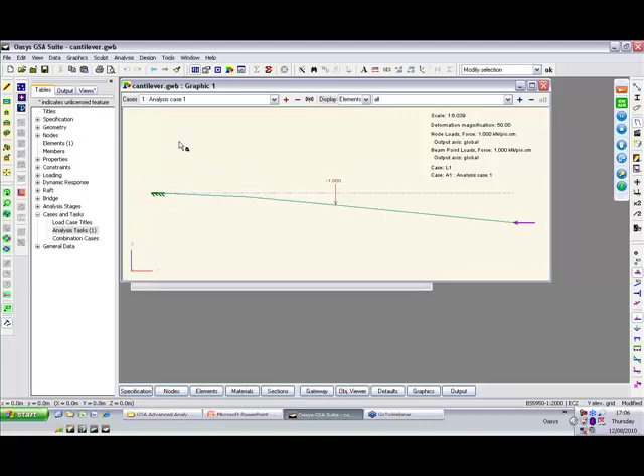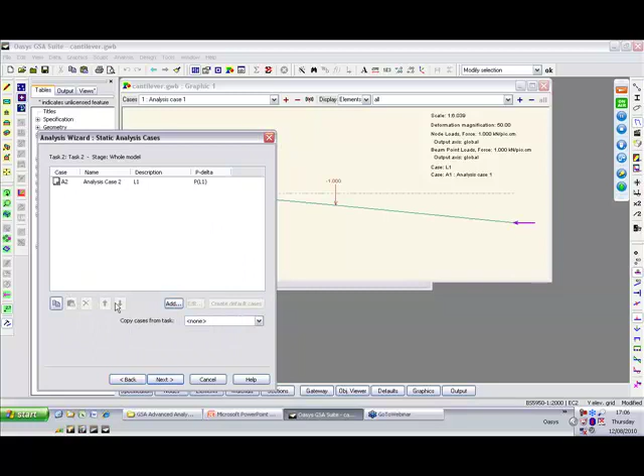And if indeed we run a linear analysis and look at the results, that's indeed what we get, as you'd generally expect. A bit of deflection. Now, we can also run a p-delta analysis on this, because obviously as the cantilever bends over, this axial load should start to induce bending moments on here. So let's do a static p-delta analysis. Add in our loads, just the one load case, and analyze this.

And if we just add in the bending moments, so you see, for the p-delta analysis, the bending moments are pretty much the same still. And again, likewise, if we do another, say, non-linear static analysis on this little cantilever, and don't magnify, we can see the bending moments and so on are very similar.

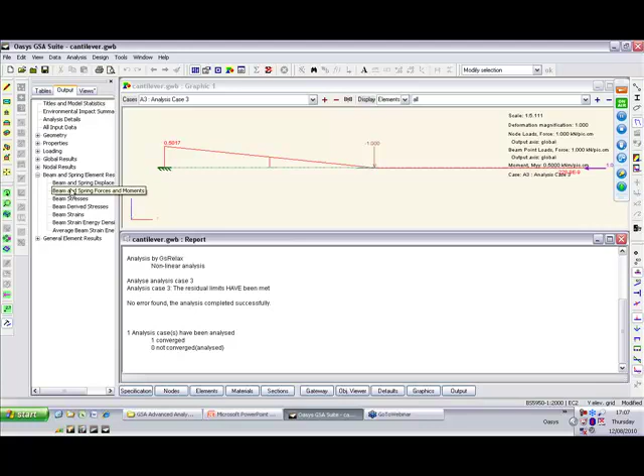If I go and open up the output, let me just reduce that down a bit, so just remove the interesting points from the results. So we're just seeing the end value. So see, case 1 is the linear, 2 p-delta, 3 is the non-linear, and you can see the axial load is reducing fractionally, and the moment, if I use the highlighter, the moment is fractionally increased.

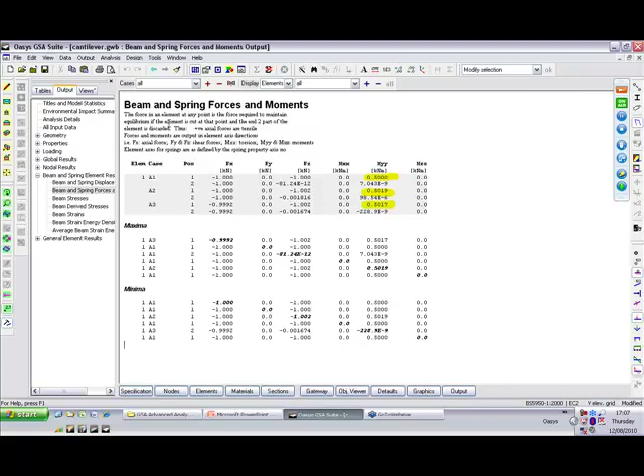Not a big difference, but then again, linear analysis is suitable for small deflections, and that's exactly what we're getting at the moment. If I go and add in that, you'll see that the deflections are tiny. So let's delete those results, leave the analysis cases there, and I'm going to increase these loads by a factor of 10. Okay, let's rerun the analysis.

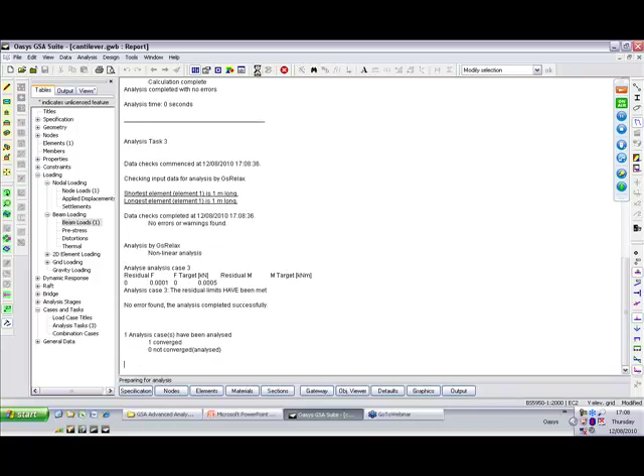Now, the load is now 10 times the size, and you'll see that, let's look at the axial load. Actually, let me just do that. Right, the axial loads, sorry, what am I getting there? By case. Right. Yes.

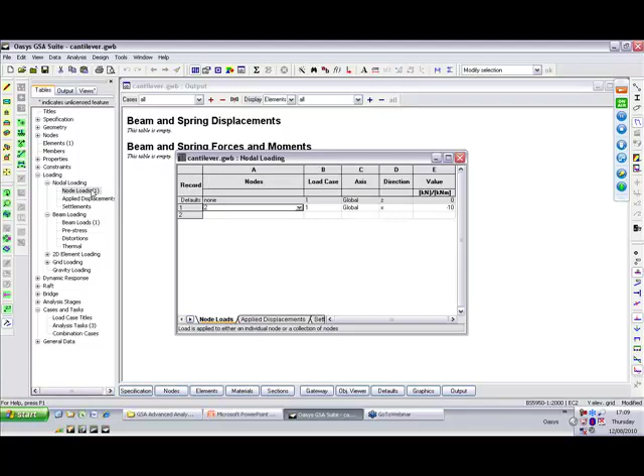The deflections, you see, are getting slightly larger with the non-linear and p-delta. And if we look at the axial loads and the bending moments, you see the axial load is slightly getting smaller, and the bending moment is increasing slightly. Now again, they're still very similar. But now, if we again multiply these by 10, so the loads are now getting quite significant for this small cantilever, and run these results again.

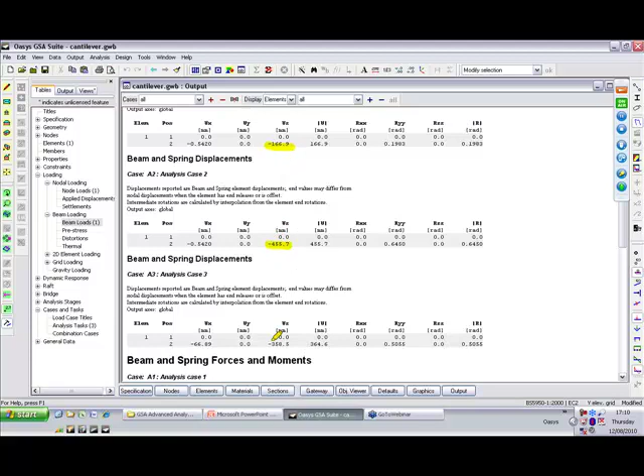We can see that now, looking at the deflections, the static linear analysis is getting large now, and they're diverging hugely from the p-delta and non-linear. This is now a large displacement problem, and linear analysis just isn't working. Likewise, if I scroll down and we look at, say, the axial force, now you notice the axial force is the same for the p-delta and the linear, but for the non-linear, axial force is greatly reduced. But on the other hand, the moment is much larger than the static.

So if we just go over to the graphical view, we get a good idea of what's going on. Now this is deformation magnification of 1. So this is actual deformation, and you can see why we're getting increased moments, and also of course likewise the axial load is reduced because the whole thing is shifting. The whole is very much a different problem to how we started. So linear analysis can be good for small deflections, but once you get large deflections in your model, non-linear is required.

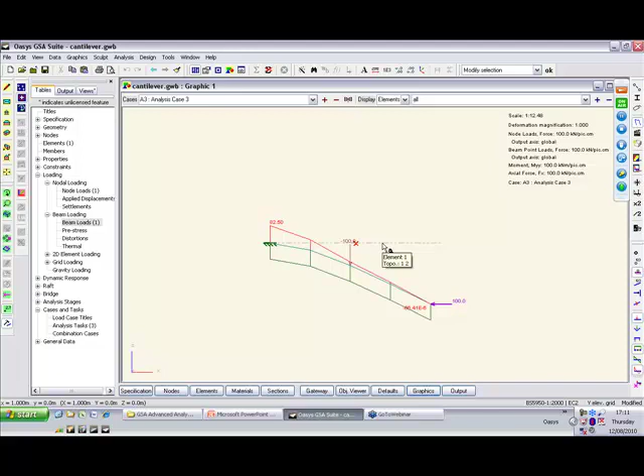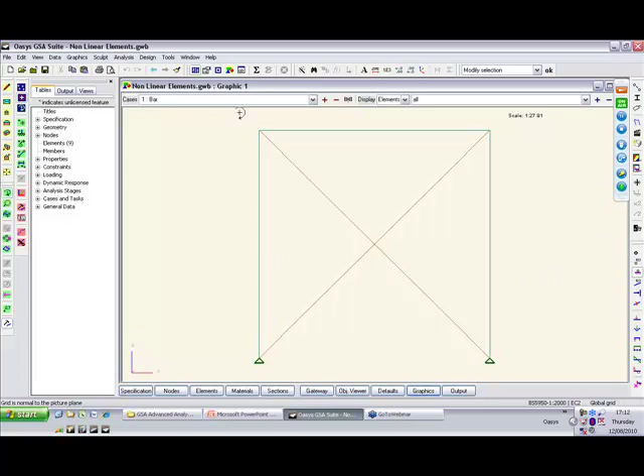Now, apart from that, so there's that aspect of non-linear. We can also use non-linear elements. Now, non-linear elements are strut and tie elements, so compression only and tension only elements. So we have a simple portal frame with beams around the outside and some cross bracing. Now I've used stage analyses on this so that the first analysis case we've just got bar elements, so bars are axial only, carry tension and compression. Oops, missed.

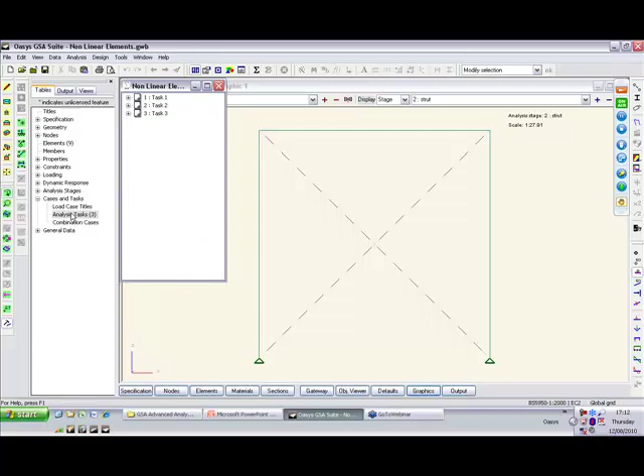Okay. We've also got a strut case where we've got compression-only elements, and tie-only. So let's run these three static analyses. These are linear analyses but with non-linear elements. And let's look at the results.

So if I switch on the axial load readout, we can see the axial load when the bars are the same in both directions, and we're getting a certain amount of bending moments. If we go to the strut model, we can see we're getting a much higher compression load in this strut, nothing in the other direction. So it's carrying the compression load from this point load at the top. I forgot to show that, sorry.

That'll make more sense. And likewise, if we turn these into tie elements, again, this element is carrying all the loads, the other member carrying nothing at all. And the deflection is slightly larger as well.

Now, because these are non-linear elements, in a linear analysis, what will happen is GSA will check them. So let's say they're using struts: if the strut goes into tension, GSA will switch them off and then rerun the analysis, and then see how the results go from there.

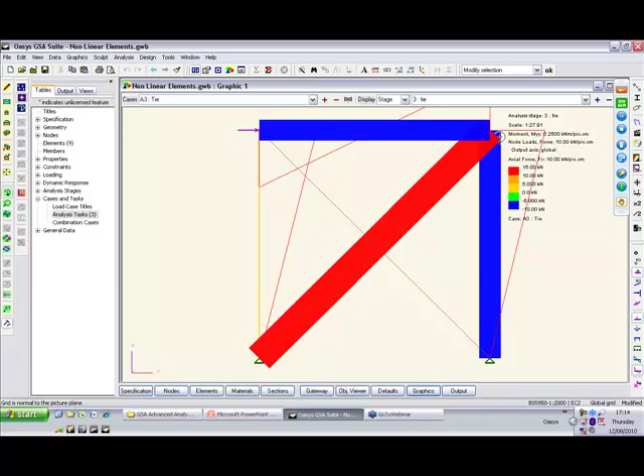Now, someone's got their hand up. Okay. Let's check. Well, if you've deliberately put your hand up, can you put a question in to us? That's Will. Okay, no worries. All right, I shall press on.

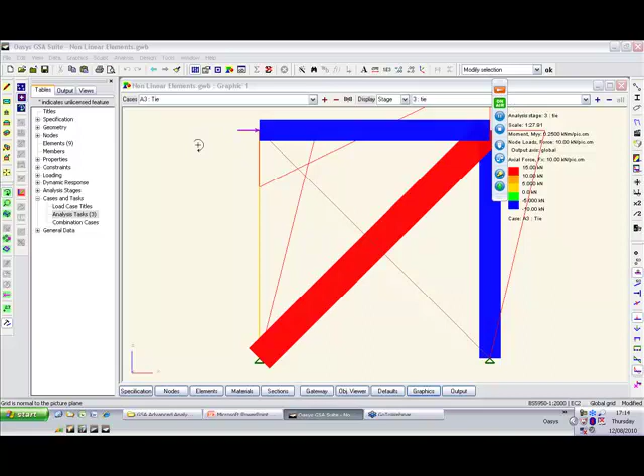Alright, so that's non-linear elements, but the linear analysis, and because these are non-linear, you can't then combine the results together as per normal. Okay, so we've also got non-linear materials. Now, for a non-linear material, basically we want to induce plastic hinges and that sort of thing in the model.

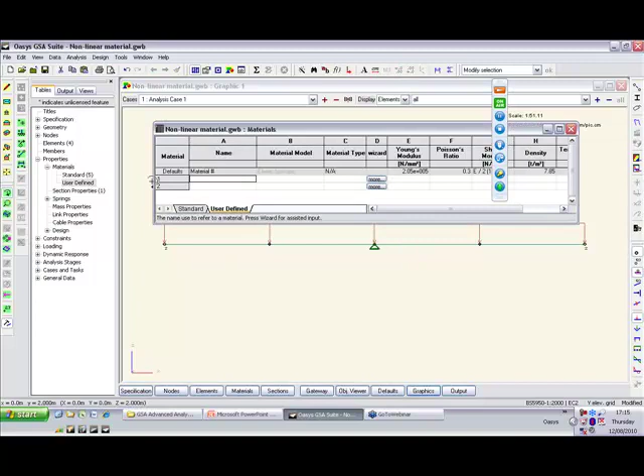So here we have a simple 2-span beam with a UDL on it, and if we set up some user-defined materials: in the previous version of GSA, you could specify plastic capacities of materials. Now we've actually got a number of different material types in here: elastic plastic, and also now orthotropic materials, for your 2D elements and timber materials and so on. We'll be talking more about that in the next webinar. For the moment, I'll just look at plastic materials.

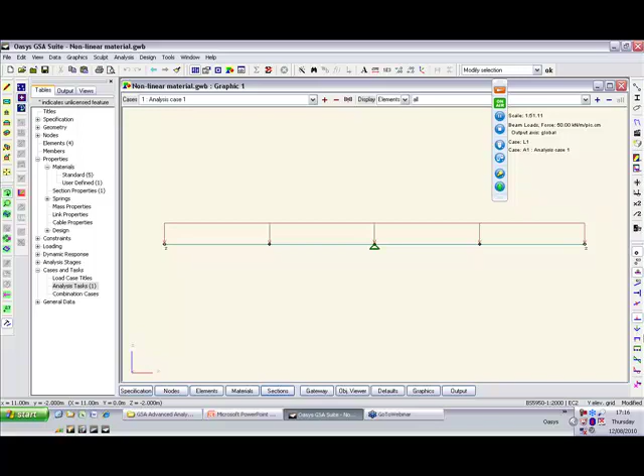So if I base this, let's say, on steel, we see we've got a yield stress in there of 275 newtons per millimeter. And make sure we apply this into the sections. Now, if we run a linear analysis on this, if we just hit the Analyze button, we can see that we get more hogging moment than sagging moment, and that's all to be expected.

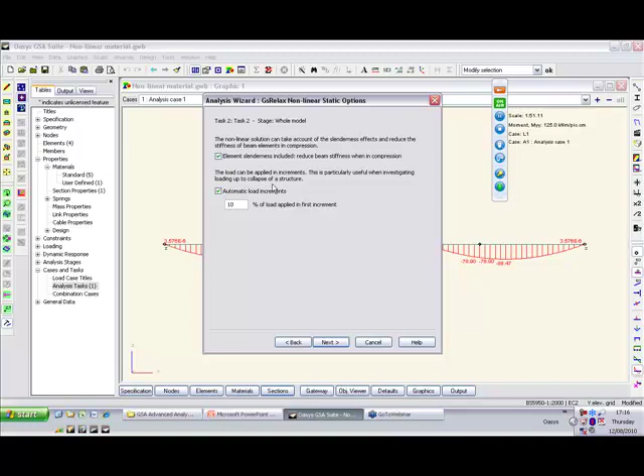Now, if we run a non-linear analysis on this with the non-linear materials, we can increment the loads until the plastic hinges form. And I've got node number 5. Non-linear static, increment the loads, deflection control on node 5. We can make the analysis stop once the model has deformed too far. Being non-linear, if the model is fully yielded, it will stop anyway, but I'm adding that in just to make sure. And then of course in the Z direction,

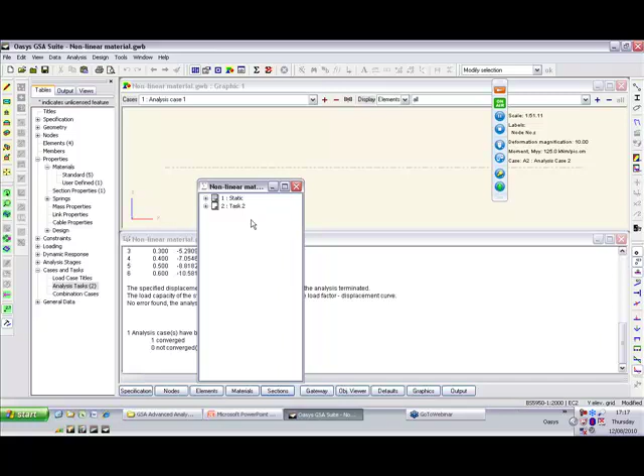we add in our load case and analyze and see what happens. Okay. Now that just reached the deflection limit. Alright, I am going to rerun that. And let's just take the displacement control off and see what happens. That's better.

We can see here that the sagging and hogging moments are now effectively the same. We've got plastic hinges, and we can see in the loading increments back here, first elements 4 and 5, the central parts, have yielded in bending, and then finally the middle 2 spans have yielded.

So now you'll note that non-linear elements automatically cause a non-linear type of analysis, though admittedly it's still a linear iterative analysis, strictly speaking. If you have non-linear materials, you need to specify a non-linear analysis to get the plastic hinges forming.

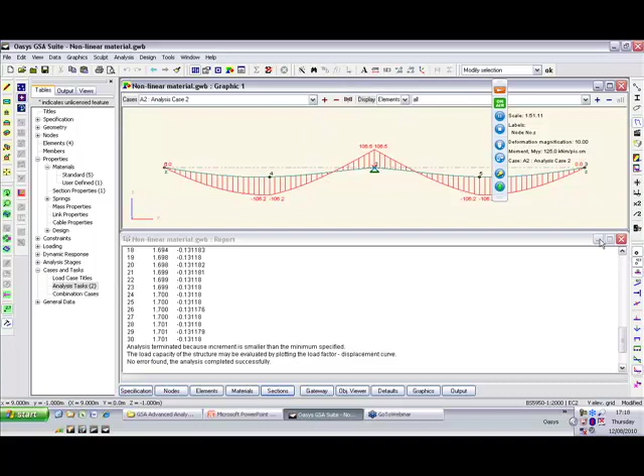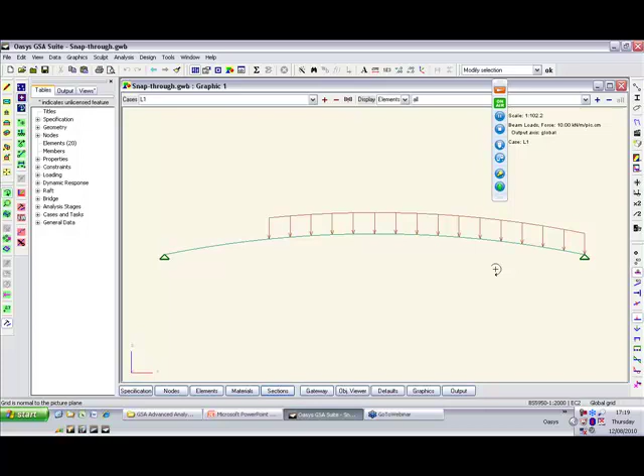Now this load incrementing is also quite good for geometric non-linearity. So if I take this model, snap through, here we have an arch model. It is pinned at the bottom, and I have a load over part of the structure. And what I'm going to do now is, just delete that, I am going to do a non-linear analysis, incrementing the loads, and I'm going to use deflection control on node 8 with a translation of a meter. So basically I want this arch to snap through to the far side.

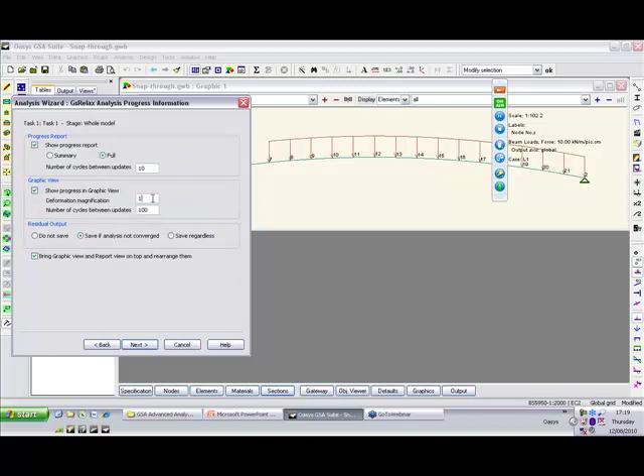Add in that load case. We won't need a deformation magnification on this. Let's analyze that. And you can see the load factor is increasing, and you'll see it will start to give in a moment. Yeah, we see we're beginning, and you see it has now snapped through. It's just a magnification of 1, so this is the actual shape, and we'll see that it snapped through at a load factor of about 4.3.

Now you also notice on the readout, if you do this, you get a message saying the load capacity of the structure may be evaluated by plotting the load factor displacement curve. Now you can find this in the chart views.

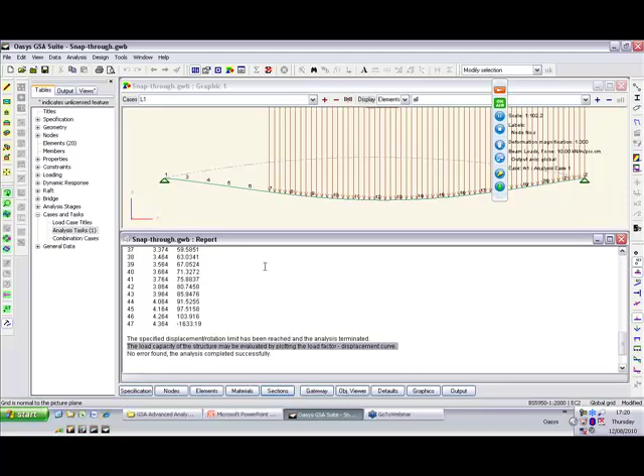So let's look at this analysis, and we'll see that as the load increased, it reached a load factor of about 4.3 before the snap-through occurred. Now, if these loads are working loads, that means you're working with a factor of safety of about 4.3. If these were unit loads, then that would be your load capacity.

There are different ways of looking at this. This analysis can be used not just for arches, but for general structures where you have got compression. Imagine bridge trusses and that sort of structure where you're dealing with quite high compression loads and you're worried about stability. So that's the various nonlinear aspects.

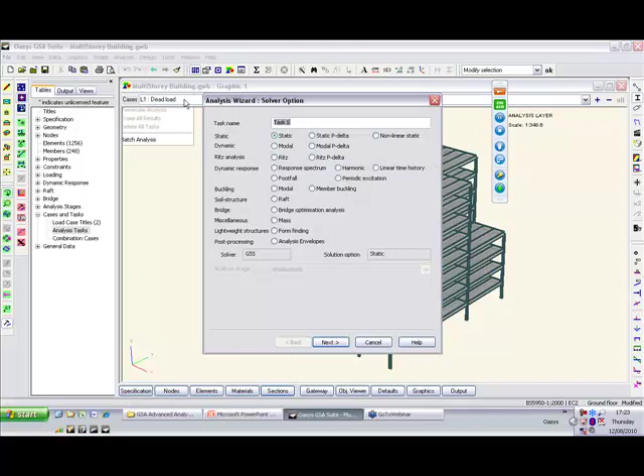Now we come on to dynamic analyses. So I take another model I've prepared earlier, and this is a simple multi-story structure with floors and a bit of setbacks and so on. And we can do various analyses on this of the dynamic type. Now we have 4 dynamic analyses in GSA. We have the modal and we have the Ritz.

Modal looks at vibrations in all directions. Ritz is usually used for seismic analysis, and it concentrates the analyses in particular directions. We also have P-delta aspects to these analyses. What this does is it takes into account the axial load on the various elements and sees how that affects

the vibration. Now imagine, when something is in compression, its stiffness is reduced and therefore it vibrates at a lower frequency. Conversely, if it's in tension, imagine a guitar string or something like that, then the frequency goes up because it's then stiffer.

So let's run a modal analysis, and we can choose a number of modes to look at. We can add in additional restraints, but we don't need to in this model. We can force it to vibrate horizontally or vertically. If we're looking for vibrations up to a particular frequency, we can have cutoffs.

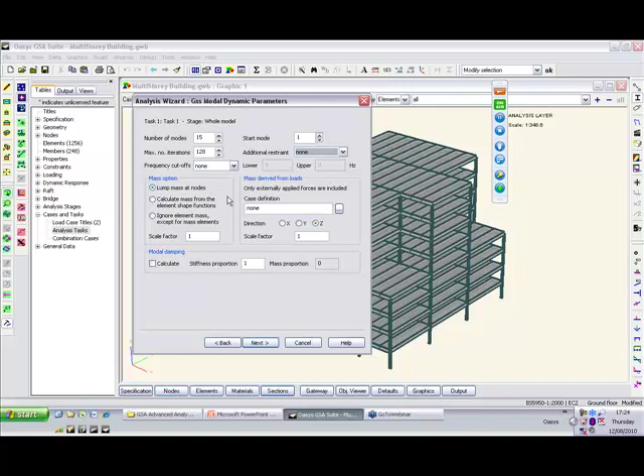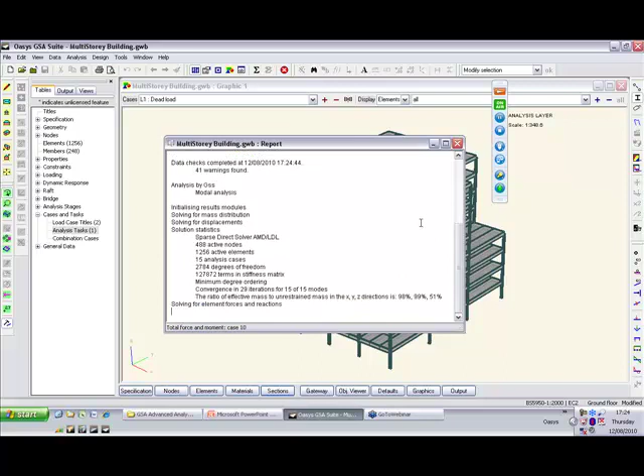The mass is included. This is self-weight calculation, so we do not need self-weight from the loads, but we can generate mass on the structure from the applied loads. I'll just take 10% of the live load for this, and we analyze. Right, that's done. And let's look at some of the results.

So the first vibration mode is just over half a hertz, and so on, and we'll get a number of other vibration shapes. Now we can look at these in summary. If I go to the output and get the global dynamic summary results, we can see we've got the frequencies running from half up to about 5 in this particular analysis. Now that's important for the seismic people. You see we've got the accumulated mass and the number of modes coming in here.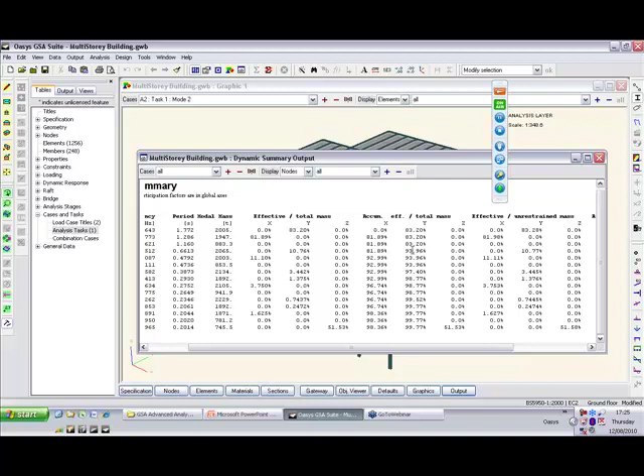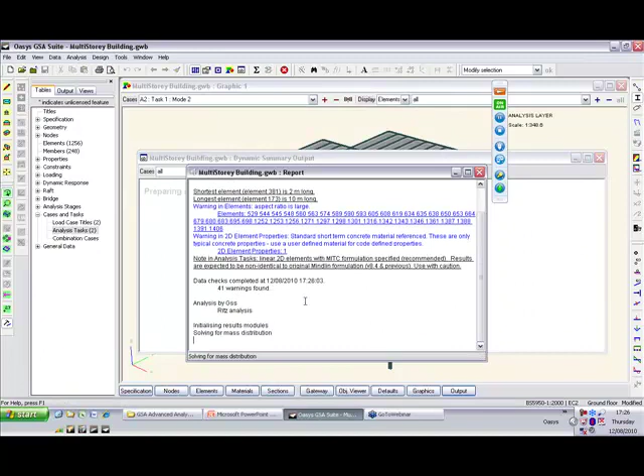If we similarly run a Ritz analysis and just ask for 5 modes in the 2 horizontal directions, and again add in some dead and live load, run that. Okay. We can see that with the Ritz analysis, it actually gets over 90% accumulated mass, at least in the y direction there, within just 3 modes rather than 4. The bigger the building, the more pronounced this effect will be.

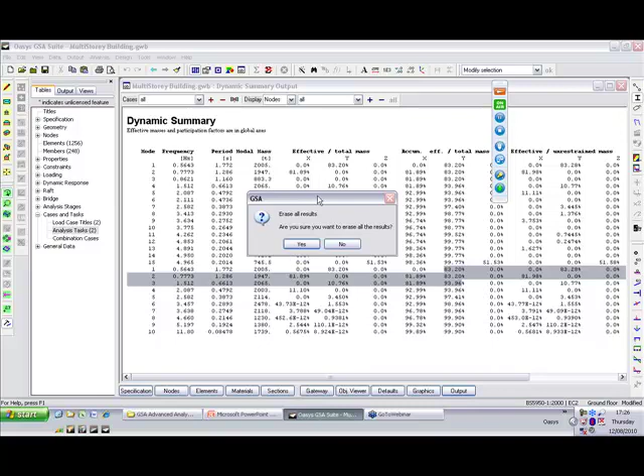Right, let's erase those results, and I am now going to do a Ritz P-delta. Now basically for both modal and Ritz P-delta, we add on an additional P-delta case. So let's just take 5 in each direction, add in my dead and live, and I'm just going to copy those down into the P-delta.

So this will load up the structure, reduce the stiffness in the columns, and then give us results. And so you'll find that the frequencies will be slightly lower in the structure. Again, the bigger the structure, the more pronounced the P-delta effects will be. And there we have our modes. So there, not a big difference in this particular example.

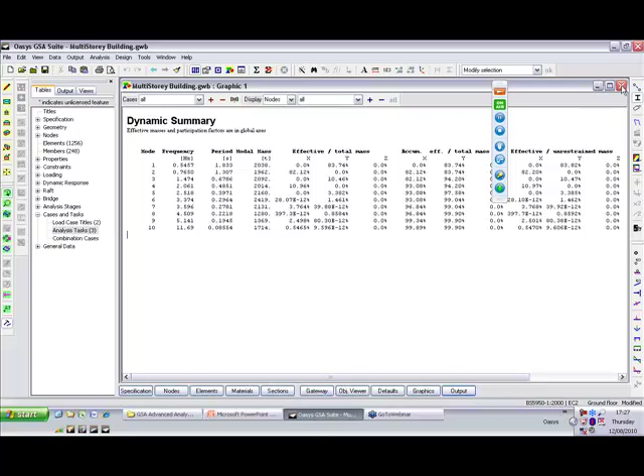Now, once we have the Ritz analysis, what we can then do as a post-processor on this is to examine the building under seismic loads. Now, what you need to do for the seismic is to specify a response spectrum. If we look, we have a number of code-based seismic checks, and you can define your own as well.

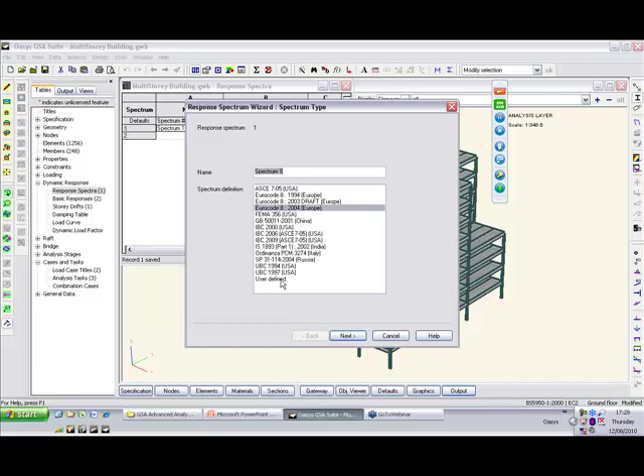This then deals with all the various aspects you need to set for the seismic, and the properties, damping, and the response curves. We also need, once we have that spectrum, to say we want the response to be plotted in particular directions. In this case, the x and y direction, and you can choose a CQC or SRSS summation of the values.

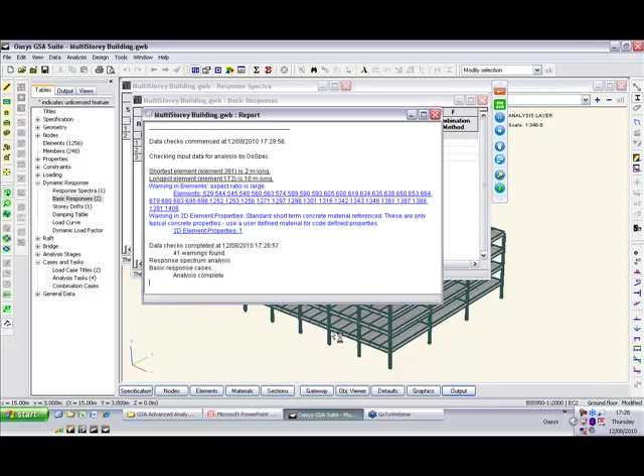So let's run a new analysis. Because we've now got dynamic results, these dynamic responses are now available to us. So response spectrum, choosing the last Ritz analysis, because the other ones haven't got results. Let's analyze this. Right, that's complete. So what we now get, we can get the bending moments from the responses. We can get the axial loads, and so on.

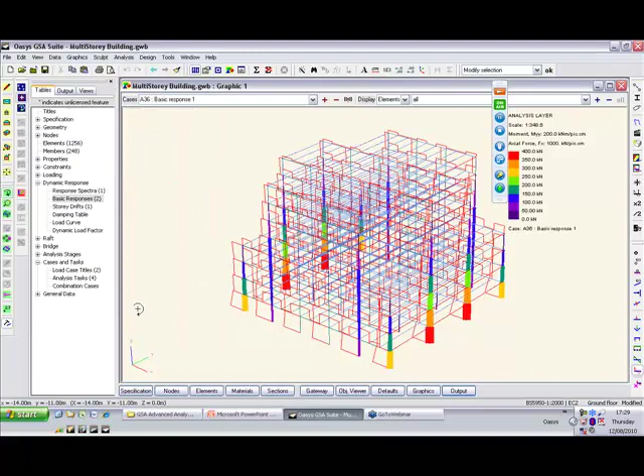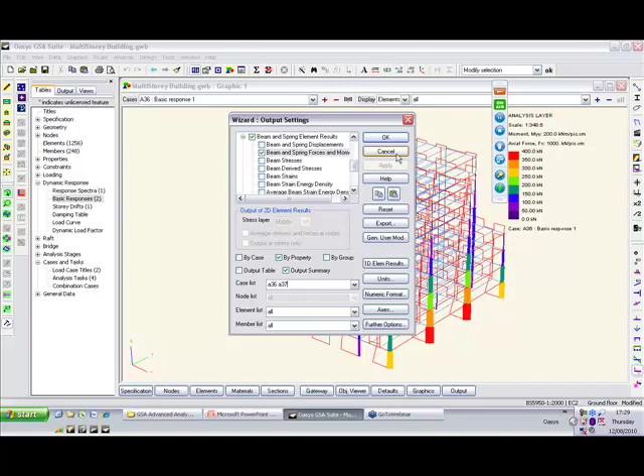Or of course, if we go to the output, we can say, okay, I want the beam forces and moments by property, give me the summary, and I want A36, A37. So this will give us the worst results of both. So we can see for the column, for example, the maximum axials and moments and so on, and the beams in one direction, and all the various elements. So you can use these for your worst case design criteria.

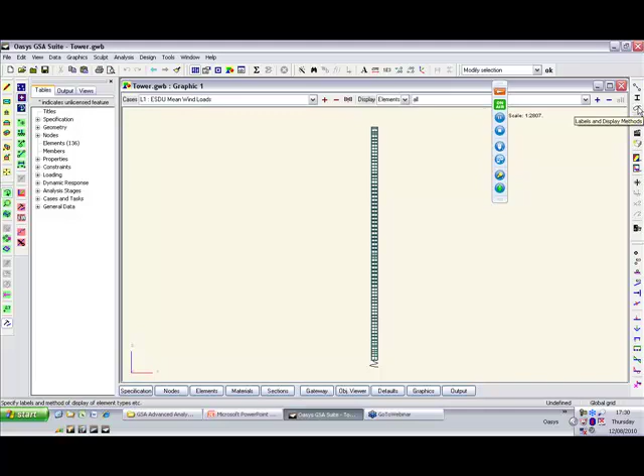So that's response spectrum. Now we can also do linear time histories with GSA. So if I take another model. Now this is a model of a building stability core, and because the rest of the structure doesn't contribute to the stiffness, the stability is just provided by the core. In this model it's been simplified so each floor is represented by a mass, which clutters things up a bit. So I'm just going to switch those masses off so we can see the structure.

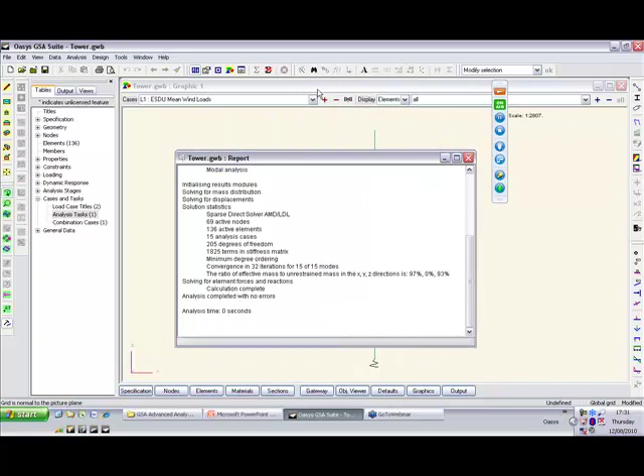Now what we need to do for a time history is again run a dynamic analysis on this first of all. So I'm just going to run a modal analysis, and you have to run sufficient modes. I should take 15 off here. I haven't got any additional forces to generate loads. So let's analyze that. And we can see from this we get a number of vibration modes.

Now what we want to do is a time history of the effects of a wind gust. Well, it might be a wind gust, it might be an explosion, it might be some other transient load on the structure which is such a short duration the structure hasn't had a chance to fully respond to it. Now for this we will need, under dynamic response, a load curve. These load curves can be a seismic one, such as if I look at the wizard on this one.

They can be quite complex, or in this case I'm going to do a wind load gust of just a 3 second gust. So at time 0 it's 0, at 1 second it's at full value, at 4 seconds it's still at full value, and at 5 seconds it's dropped back down to 0 again. So it's a very, very short gust on this structure.

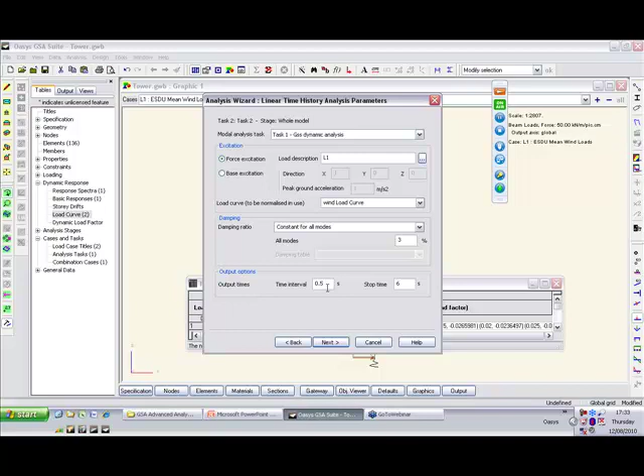I'll then do a new analysis, this time a linear time history, where I take the modal results, I say I'm using the wind load, and the curve is the wind load curve, set the damping value for the overall structure, and also look at how long we're interested in the structure. Now it was a 3 second gust, so if I take it up to say 6 seconds, the wind has actually dropped off by this point, and time interval.

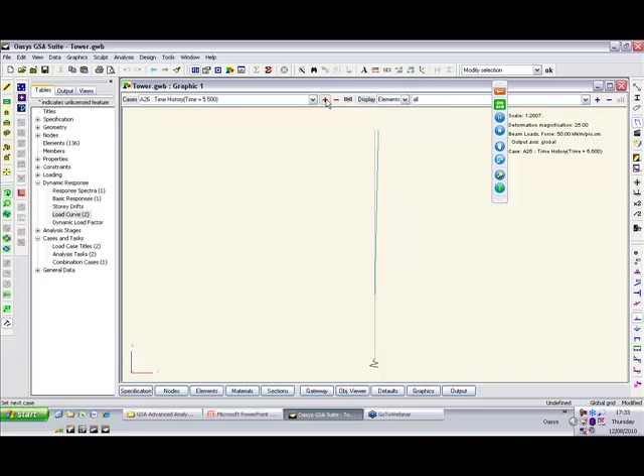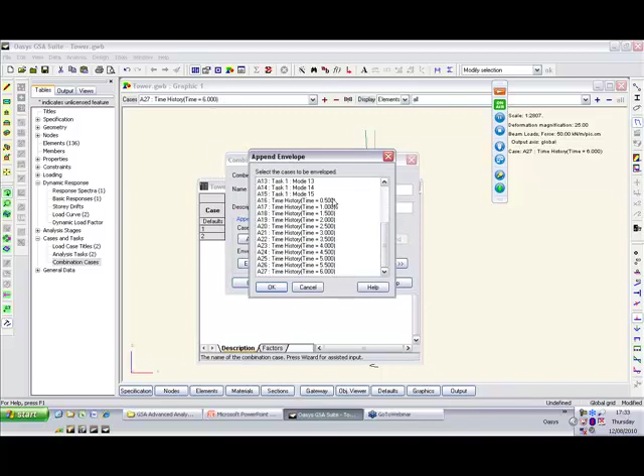I can then get out the bending moments on the structure, and also the displacement on the structure. Basically, this tower has actually deflected over about 2 meters under that gust, and of course you can get the output, the bending moments and forces and so on for your detailed design.

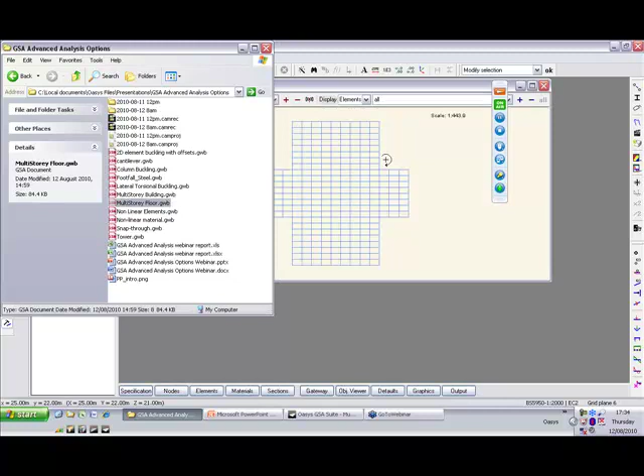Now, two more types of analysis we can do are the footfall and the harmonic analysis. These are similar in some respects, in that they are regular vibrations being applied to the structure. Footfall is a human-induced vibration, people walking around, and the harmonic is from vibrating machinery, plants, compressors, washing machines, that sort of thing.

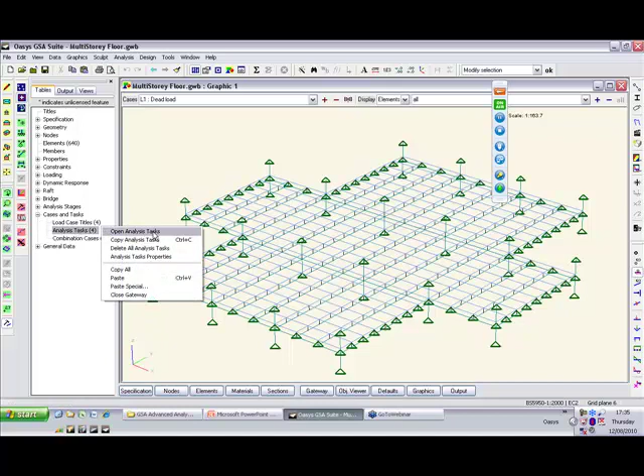So, first of all, I've taken a subframe from the multi-story building we looked at earlier. Because this is a low amplitude vibration, we're allowed to take the cladding restraining the floor edge. The columns are all half height with pins at the end, and we have the loads on the floor. So first of all, we need to do a modal analysis on this floor, and I'm just giving a number of modes. You need to get modes up to sufficient frequency. I will include dead and live loads on here.

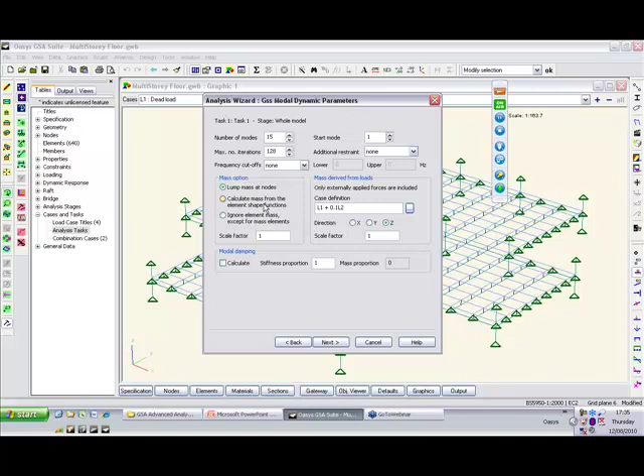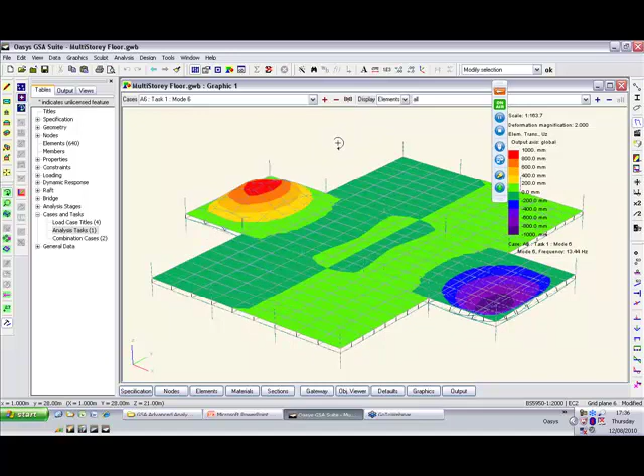Alright, that's done. And let's look at the results. Right. So the first vibration mode, it's looking quite good. Yep, shaking nicely. And sometimes the contour results can help. So if we look at the 2D contours, we can see the vibration shape, and similarly we get the other vibrations, mostly in the large central part, and then eventually, yes, there we go, localized vibrations begin to occur in those wing areas.

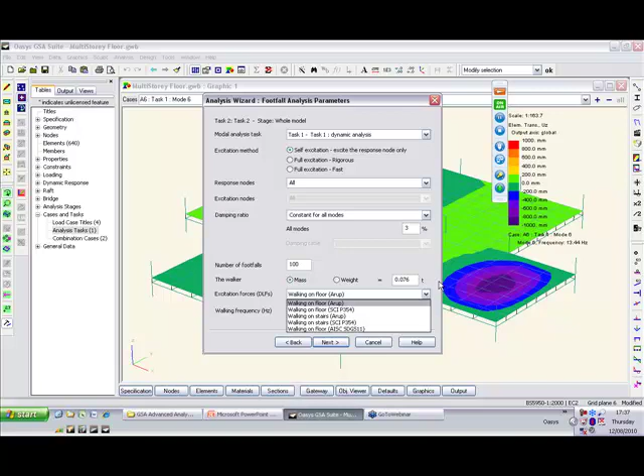Now once we have the sufficient vibration checks on here, we can then run a footfall analysis to look at how the floor vibrates under people walking around. Now footfall is sort of a whole webinar in itself, so we'll plan to have a good session looking at this later in the year. But for the moment, just say you can analyze the floor using the Arup Concrete Centre methods, the SCI methods, and the AISC methods. Right, we get the footfall results, and we see we're getting various responses over the floor, concentrated in these edge areas, also in the middle of these long spans.

Now I mentioned earlier about machinery loads, compressors and that sort of thing. If we want to model these sources of vibration, what we need to do is put point loads into the structure, and these point loads need to be equal to the weight of the machinery. And this is a 10 kilonewton piece of kit, and likewise I've got another over there. Now the eagle-eyed will notice these are probably quite bad places to put the vibrating machine, because these are on the vibration sweet spots, but it makes better pictures and illustrates the point. So let me do some harmonic analyses on these two compressor locations.

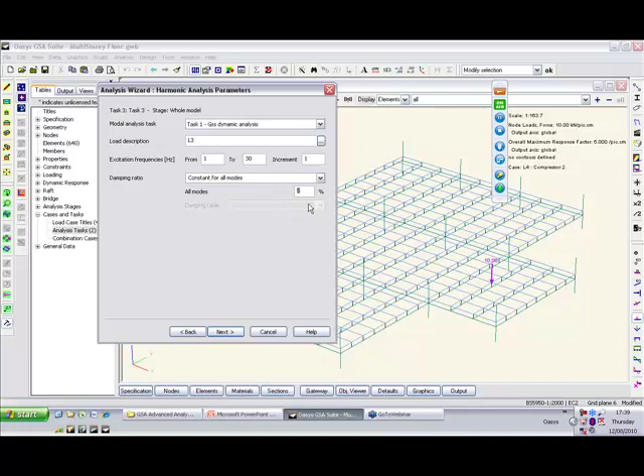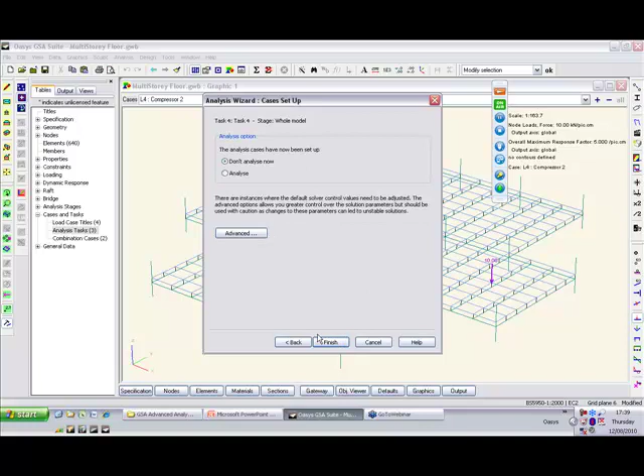Now again, we take the existing vibration analysis. We say, okay, I want compressor 1, and this compressor is going to be vibrating on a range of frequencies, let's say from 1 to 30 Hertz. And for the sake of the demonstration, I'm going to have the increments reasonably wide. In reality, you probably want the increments much smaller than this to get the full picture. And the floor damping. And I won't analyze that for the moment, because I'll set up my second analysis at the same time. So this time, taking the second compressor. And again, it was 1 to 30 at 1 Hertz increments, and a 3% damping. So let's analyze these two now and see the results we get.

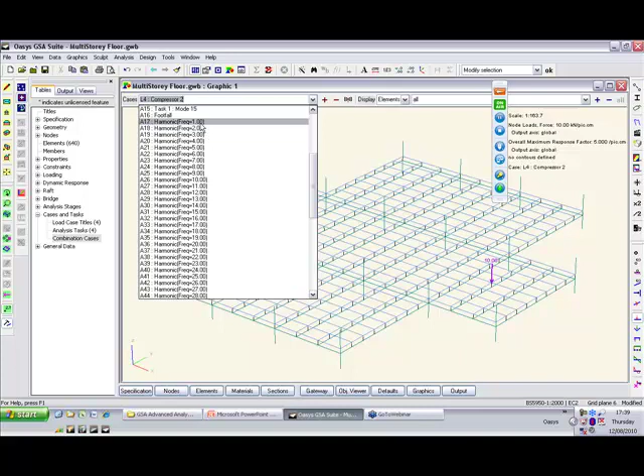Right, and you see, like time history, we get responses over a range of frequencies. So if we take the first compressor and switch on, let's say, the accelerations on the floor, you can see as the frequencies hit resonances with the floors, we get various reactions over the floor. So what we need to do now is do an envelope of those. So we take an envelope of the first set of harmonic results, and while I'm at it, I'll take an envelope of the second one as well, so we can directly compare.

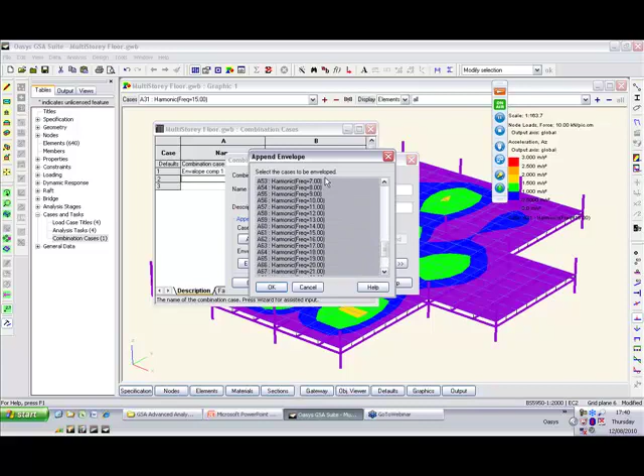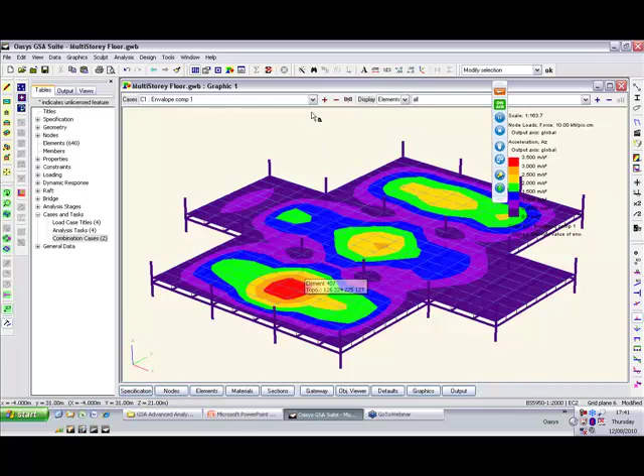Okay, so enveloping the results. The first compressor, which remember is over here, we can see we're getting an acceleration on the floor of 3.5 meters per second squared in this area, but we're also getting vibrations over the whole floor as well. So this piece of kit is affecting just about the entire floor. Conversely, if we have the compressor over in this corner area here, we're getting much higher vibrations on the floor locally to the compressor, but the rest of the structure is virtually unaffected. It's very much a localized problem. So you can use this to examine good places to put the plant, or alternatively the effects that plant will have on your structure.

Okay, so that's a look at vibration. Now then, what about buckling? Have people used GSA for buckling checks so far?

Good, coming in. Buckling looking reasonable. Okay, right.

Let's have a look at these results. Okay, you can see just over half of you have used buckling. Interesting, but just under half haven't. So let's look at the buckling options. There are two types of buckling in GSA. We call them member and modal buckling.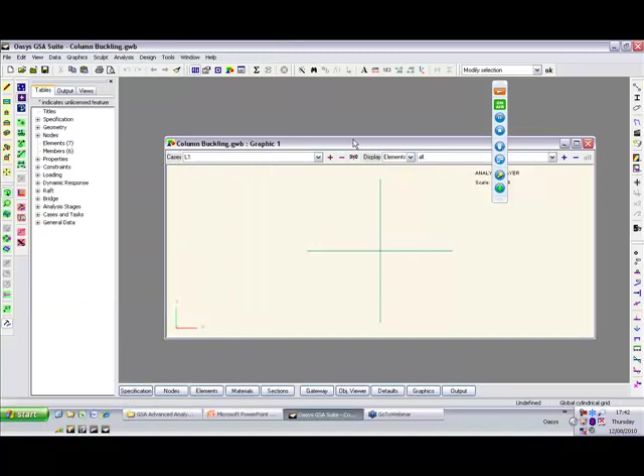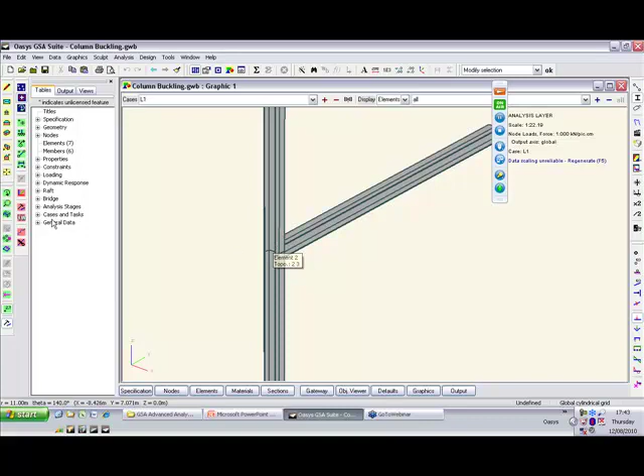Let me take this little example first. This is a column subframe. You can do this on a full-size model, but I'm using the subframe, and it has a point load at the top, and this point load is just a unit value. And at half height, I've got a minor axis restraint on this column. Now, we can use the non-linear member buckling to see how this column will actually deflect under load, and the elements are elements 1 and 2.

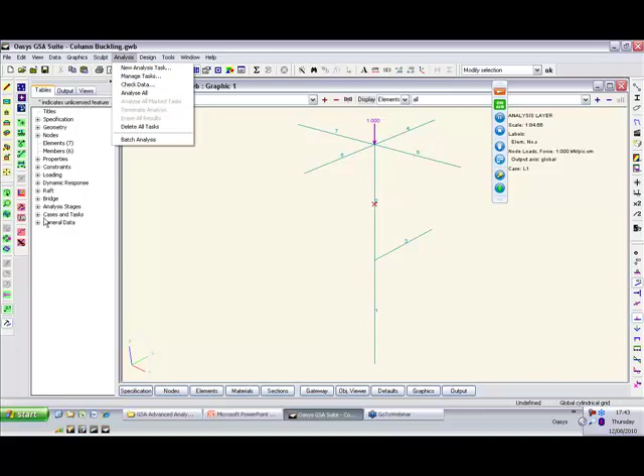So let me run a new analysis task, which is going to be a member buckling check. What this will do is it will iterate, it will increment the loads up until it fails. So we're interested in elements 1 and 2. That's the ones we're looking at. We add in our unit load, and it's going to magnify the deformation. So let's analyze this and see what happens.

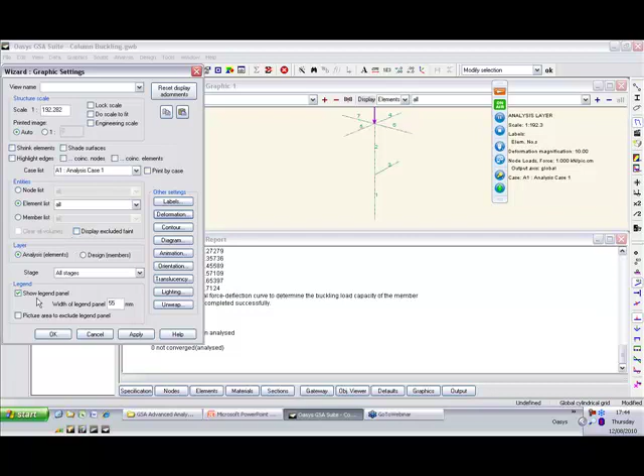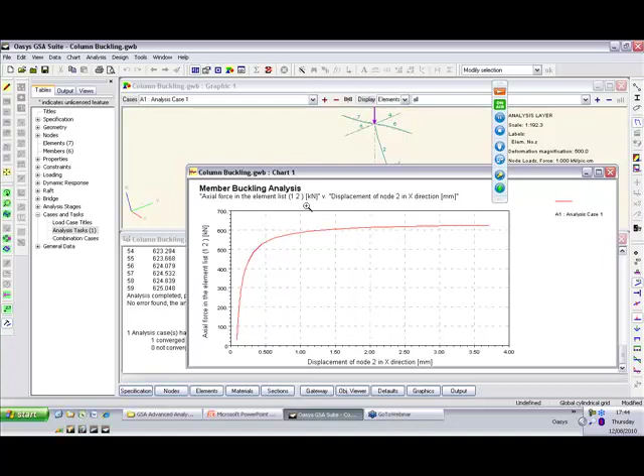So loads are increasing, and it says it's finished. So again, let's look at the chart of the values. So this column has buckled, and if we look at the chart view for this, we can see that as the load increases, it begins to buckle out, and then it goes. And so you can make a judgment on what axial load you're happy with that column taking. Now note that this does take into account non-linear materials as well.

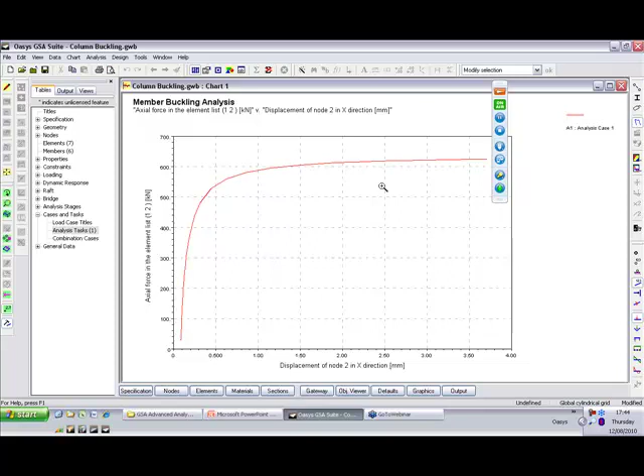Now there is another option on the buckling checks, which is the modal buckling. The modal buckling looks at the different ways this column might bend. In this, I deliberately had a restraint on the minor axis. Usually when you design a column, you've got to check in the two directions. So let's do the modal buckling check for the first two modes. I'm going to have my unit load in there, and to avoid torsional instabilities, I'm going to suppress the torsion in this model.

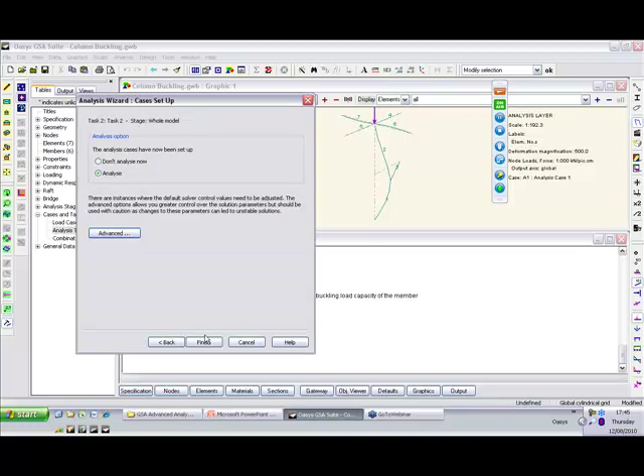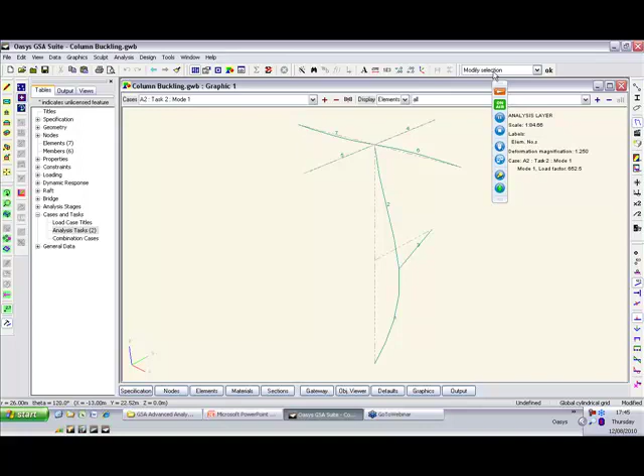So we now have two modes, and we see the first mode where it's buckling in the major axis direction. We've got a load factor of 650, which essentially is the axial capacity of that column in the system. The second mode, we've now got minor axis bending, and a load capacity of 1165. So this was a unit load. Alternatively, if we're using working loads, then this would be the factor of safety on that structure.

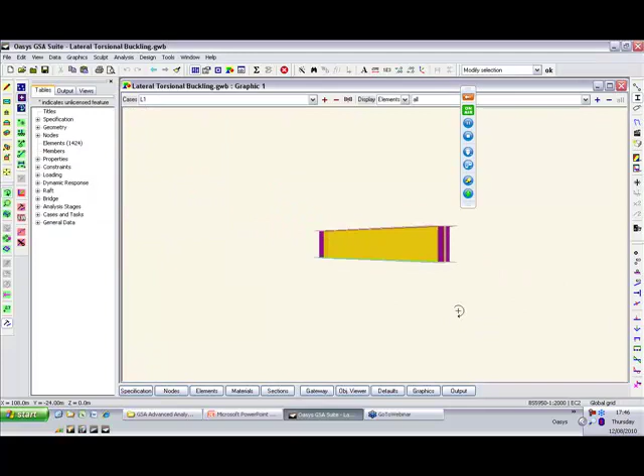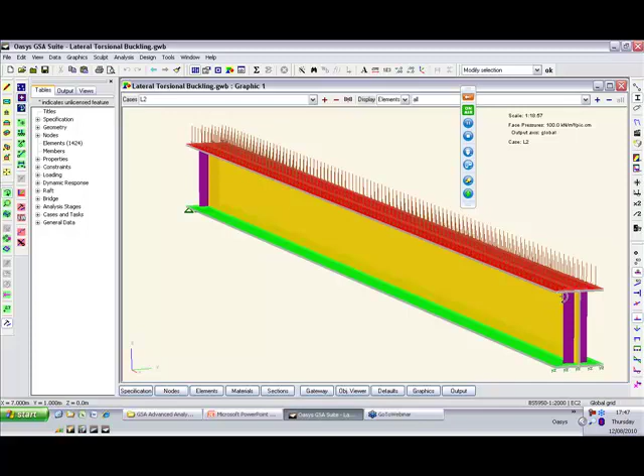Now this modal buckling can be used for other types of buckling checks, such as lateral torsional buckling. This is a plate girder that I've made out of 2D elements. You can see we've got supports at each end. I've also included a UDL on the top flange, which is sort of a working load on this girder. To compare the results with and without the stiffeners, I have set up an analysis stage called no stiffeners, and it's everything except property area 4. Property area 4 is these purple elements, which are the stiffener elements.

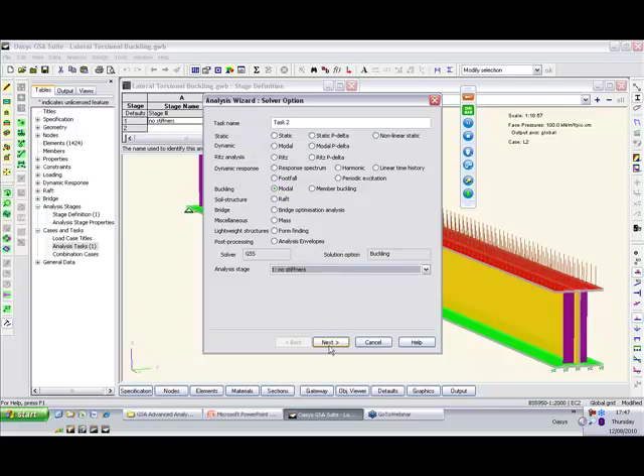So let's set up my two analyses. The first one is again modal buckling on the whole structure. Just get the first mode and have that top flange load there. Let's not analyse it yet, because I'm going to add in the second analysis, again modal, this time with no stiffeners. Again, first mode, load case 2, and analyse both of those. Wait for a moment, and they're done.

So the results: mode 1, let me switch off the initial state so you can see a bit clearer. You see this plate girder is buckling laterally at a load factor of 2.7, which is quite comfortable.

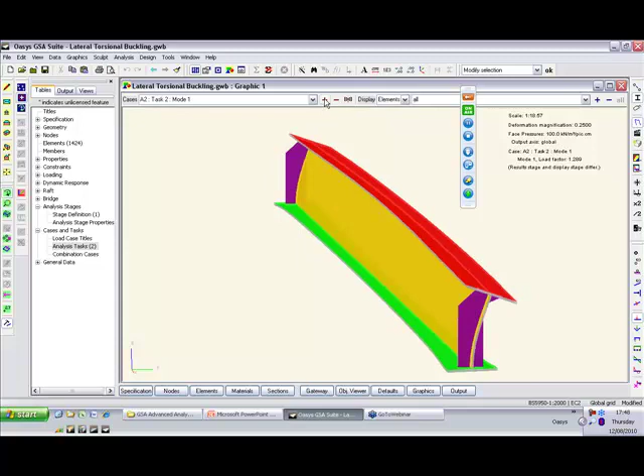Whereas if we go to the second mode, we're now told that we should be using the different stage. So this is the buckling without the stiffeners, and this load factor is coming in at 1.3, which is still safe, but it's getting within limits of factors of safety. So we might need to reconsider this particular option. So you can use the modal buckling check to work out the structural capacity of your elements, or even of the structure as a whole.